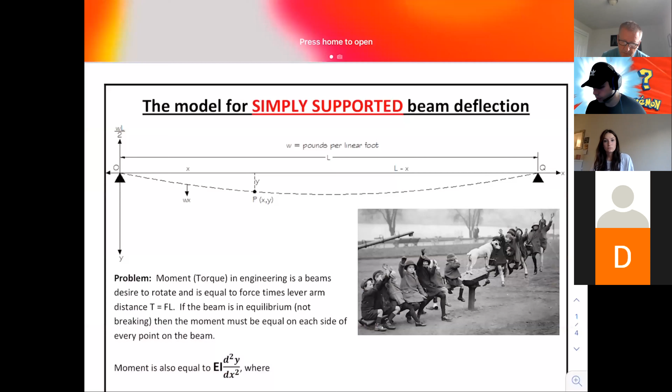It's everywhere, and so that's what I want to look at in this project. I want you to understand it, because the neatest part about it is it's an amazing sales pitch for the beauty of math. And it's amazing because, ultimately, I'd like you to enjoy this, which means I'm going to tell you too much, which is good - I'm glad I'm telling you too much. I want to help you get this problem right, because it's just too neat not to understand. And as I said, I can't explain this to very many people - you've got to know differential equations to get there.

Let me see if I can give you a proper introduction to this. Let's see what's on this sheet right here.

So let's take a look at this. Moment, or torque, in engineering is a beam's desire to rotate, and force times lever arm distance is equal to torque. And you've probably seen that somewhere before.

In other words, if I have a kid on a teeter-totter, and you put 100 pounds of force over here on the teeter totter, and this distance right here is 8 feet. Do you understand the 8 feet figures into how badly that beam wants to rotate? And so does the 100 pounds. You might be able to say, yeah, if you doubled the weight, put a 200 pounder on there, it's going to want to rotate twice as bad.

And so it's both of those put together, and it turns out you just multiply them. So that'd be 800. We'll notice the units. This is important today. It's foot pounds if it's 8 feet. Now it could be 8 inches, but we'll say it's 8 feet and it's 100 pounds. You multiply those, you get 800 foot pounds of torque or moment. Engineers call it moment.

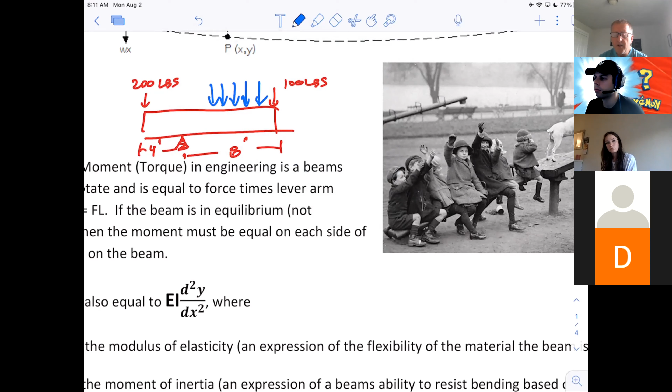And so what this is all based on is, well, this equation right here. Let me write that out a little more particularly, because notice I said moment is also equal to -- this is the equation. Now, what I still haven't decided is how much am I going to tell you about that equation. Well, at very least, you should be able to look at it and say, well, I don't even understand what that pertains to yet. But look, it's got a second derivative in it. And so do you agree that that's what we've been studying?

And that's why I can stick this in right now. That's why this project lives right here in this curriculum for me and for you, is because that's a second order differential equation. And you should be like, hey, I know how to solve those. Cool.

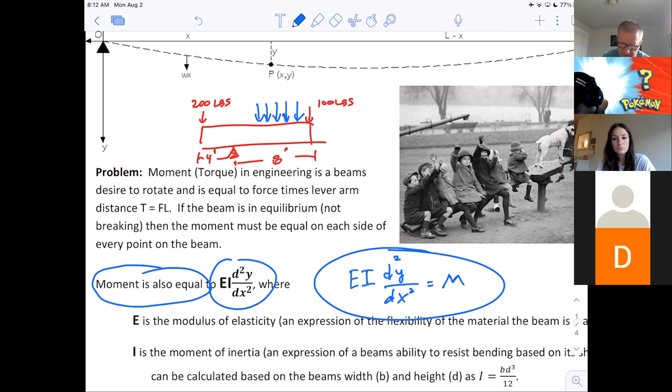And so let me give you at least a rough familiarity with what are all those letters, what do they mean. I did explain it on your sheet there a little bit, but I just want to give you a kind of a rough idea. And I have a picture at the top, but I want to draw a simpler, uglier one first, just to give you a chance to make sense of these things one at a time.

And so let's say, here's the big ravine, alligators are all down here. And so you say, all right, I'm going to put a beam across there and walk across the alligators. And so there's your beam. Of course, do you understand that you don't even have to put any weight on it and that thing is not going to be straight? It's going to bend down under its own weight.

Notice I didn't just say pounds. Why not? Because if I said the weight is 10 pounds, the question is, where do you put it? This isn't just in one location, it's pounds per foot. So if I say it's 100 pounds per foot, that means we've got 100 pounds here and 100 pounds here and 100 pounds here, all the way across it.

Most real applications have pounds per linear foot. That's how that unit is usually written, PLF, in engineering. But that isn't as nice as saying pounds per foot. One of the things I want to get across to you today is how important units are to help you figure all this stuff out.

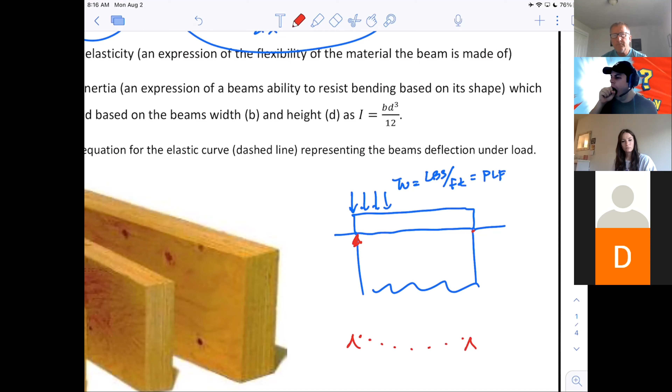Okay, cool. So the question becomes for us, and I'm going to draw this in more of an engineering fashion, this is being supported by concrete over there in the real world. Of course, the beam isn't going to be right on the tip top edge, it's going to go past the structure a little bit and have a solid place to sit. But what we're really looking at is something that kind of does this, and I'm going to exaggerate the bend so you can see it.

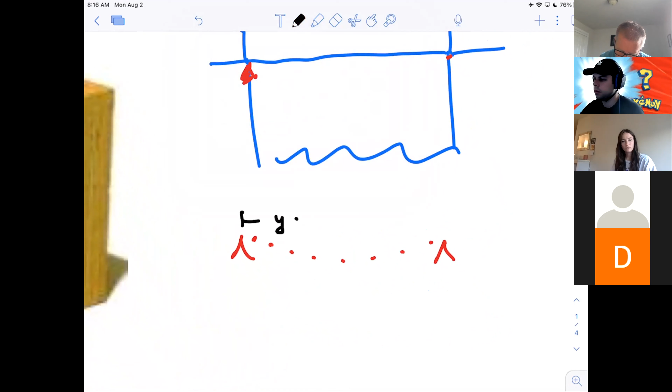That's what the bow is going to do, and the bend or deflection is the engineering way to say that—how much is that thing going to bend down? Here's some of the key things you need to understand. What we're going to do is go out a distance X, and if I draw this straight across, this distance right here is going to be our distance Y.

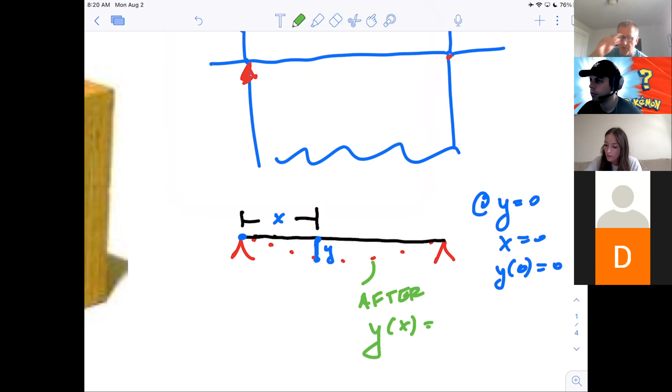Is it a circle? Is it trig, the sine wave? Is it like a chunk of a sine wave? We have all kinds of curves, right? Is it a parabola? Is it the bottom edge of a parabola? Is it the bottom edge of a circle? Is it a sine wave? It's the bottom edge of a sine wave, the bottom edge of a parabola. Can you appreciate, like, I don't know?

There's also something called a catenary curve, which we're going to study in this class too, that I'll show you later on. If you hang, like at a power line, you look out your window, hey, look, a power line. You support a string or a rope from two different ends and it just kind of hangs down. That turns out not to be a circle, not a parabola, not a sine wave. It's a brand new curve you don't know about yet, probably called... no, it's not a cycloid either. There's just a ton of curves.

In the end, can you appreciate the problem here? We need to come up with this - this whole thing hangs on this right here. I need to come up with the equation of that, because if I have the equation, then I own the relationship for y as a function of x, and now I can predict things. Now I can say this bridge is full of 1,000 people, they weigh this much, I understand how this is going to work, and I can predict how much it's going to bend, and then you can say that's good, that'll be okay. I'm gonna make that work.

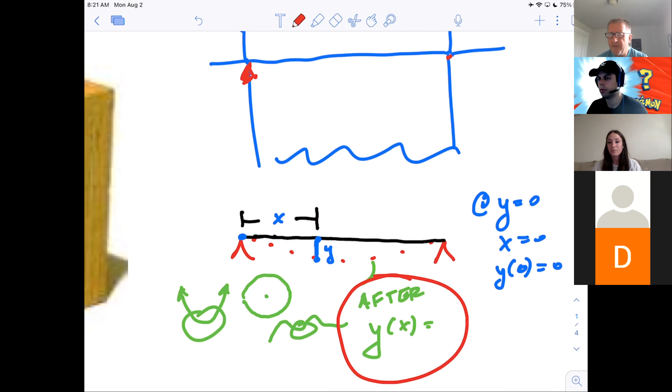Now, what else determines how much that's going to bend than just the curve itself? Do all bridges bend down the same? You tell me, what else affects how much a bridge is going to bend down? The material - how flexible it is. This right here is the material, basically a constant that has to do with the material strength. Some materials are more flexible than others, like wood is more flexible than steel. Does that make sense? So that's what the constant represents. What else affects how flexible something is, or how much it's going to bend?

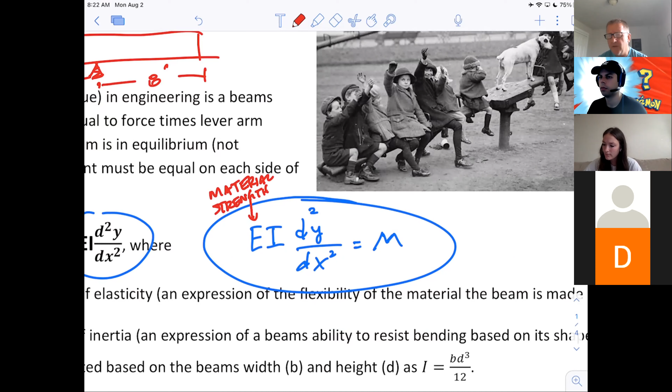Shape and size - one of the things that matters is shape really.

One of the things I can't do because I'm not at home, and some of you may know this, and I'm hearing things that I want to comment on, but...

If you were to walk across a bridge where you just dropped a board over the river, you would drop it flat because you can't balance on it turned vertically. But if you took the same exact beam and turned it on edge, do you understand those two are not going to behave the same? Which one of those is more flexible, the right one or the left one? The right one's a lot more flexible, probably.

It's the same exact board, made out of Douglas fir or whatever around here. But one way it deflects more - it has more deflection than the other. It's the same exact board.

Let me elaborate on that, just out of interest. Here's what happens to a beam if you bend it. If I turn this sideways, it starts like that, but then if it bends - I'll exaggerate this a whole bunch - it kind of does this.

What happens to the fibers in that? Why does the wood not want to let that happen? What keeps it from just breaking? Some of you have studied some of this, so you know things about it.

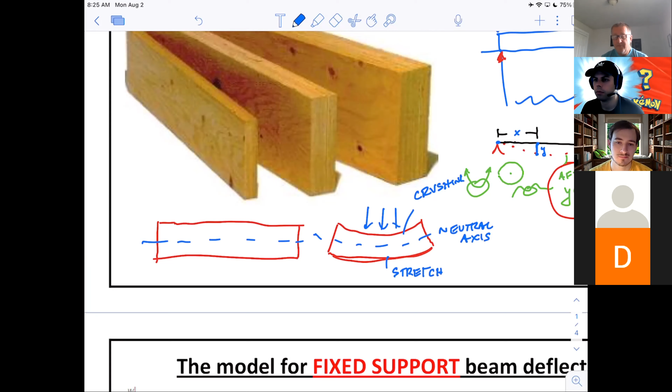If you have a weak material that can't resist crushing and stretching, then it's going to bend more. Well, that's effectively what this I is referencing - this is like the strength pertaining to the shape.

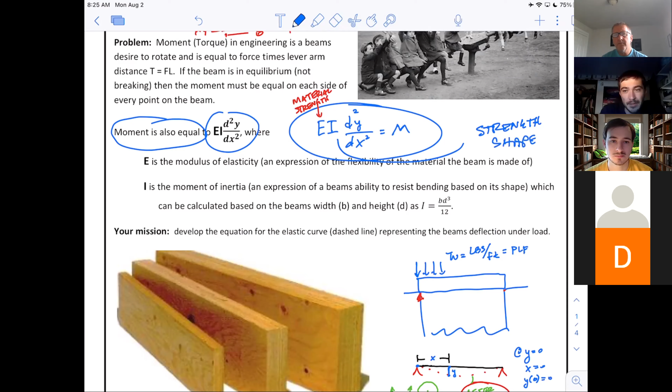Is that why I-beams are shaped the way they are? Exactly. Now think about I-beams for just a second. What happens to the neutral axis? Nothing. Those fibers aren't being crushed, they're not being stretched. Nothing happens to them, which means they don't matter. Does that make sense? Whereas the top and the bottom matter a lot.

Can you appreciate the top fibers, the very highest fibers in the beam, are doing the most of the work? And the lowest fibers are doing most of the work too. The closer you are to the neutral axis, you're actually doing less and less of the work. The further you are away from the neutral axis, the more important you are to resisting that bending. Does that make sense? Can you just kind of feel what I'm saying without me doing the math?

So it turns out that if you have an I-beam, there's kind of the cross-sectional view of it. Does that make sense? What you're doing is taking your wood or your steel or your concrete and saying, let's put it all as far away from the neutral axis as possible, because that's where all the work's getting done. Don't waste your wood in the middle.

These beams up here - do you agree that all of this wood right here is no help in a sense? Yet notice there's a whole bunch of wood there going to waste. Now, in the case of a tree, it doesn't really do much good to come in and just carve that out and throw it away. You can appreciate that's kind of hard to make.

But if you're going to pour concrete to make a beam, which is how modern bridges and overpasses are made, there's like 50,000 of these in Medford. Next time you drive underneath that overpass of I-5 in Medford, just look up at that - that's what you're going to see is an I-beam.

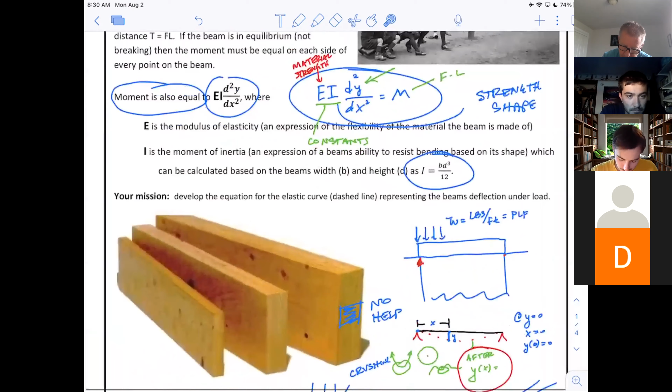B, where did I say that? Yeah, I guess I just said it right here. Width of the beam is B and the height of the beam is D. So in other words, if it's 2 inches wide and 12 inches tall, then you just plug 2 and 12 into that formula, and now you have a number.

So if you choose a beam, boom, you got a constant for that. E, if you choose a beam, you know, oh, what's it made out of? Oh, steel. Well, then you look up the number for the flexibility number. Boom, you have a constant. You're really glad to see that,

because if we're going to do this with respect to what we've learned in this class, we need equations with Y's and X's. Do you agree with that? I need Y's and X's. So when I see letters that aren't Y's and X's, I'm like, I'm going to jump off a building.

This is no good. So the fact that E and I are just constants, like if I change this to be 5, second, you know, Y double prime equals something on the other side, it's like, oh, I'm glad that's a 5, right?

But I'm not happy with this M. Do you agree with that? Because that's like the wrong letter. I need Y's and X's. If I'm going to take the derivative of this or take the integral like we've been solving lately, and we usually used Y's and T's, but that's what we did, right? Wasn't everything constants? And so we were kind of okay with that. I don't like M. M's a brand new letter.

And so what I want to show you now is how to actually get the second order differential equation that I'm going to ask you to solve for this project. So let's look at this better picture up here.

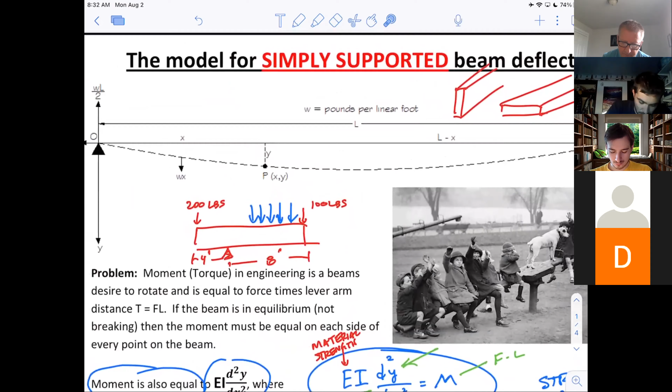Let me help you understand this a little bit more. Let's see, do I have a better example of this? Yeah, let's do it here. So I gave you these.

Let's stare at a couple of things. This is one of the things I love about this project, how important these initial conditions are. Notice the beam itself, and this little triangle in engineering language represents a support. This is called simply supported because the beam is just sitting on something, nothing else. It's not attached in some way, it's just sitting there.

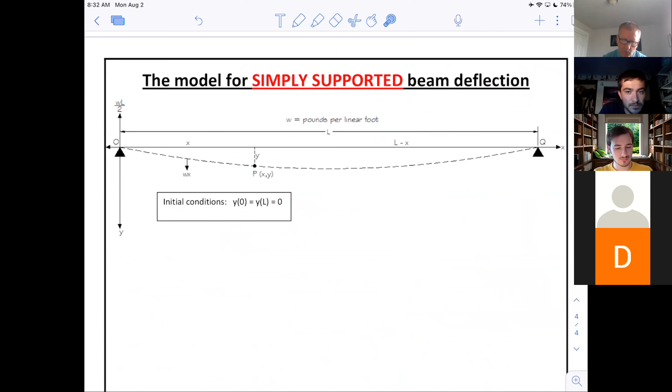Quickly, does everything beyond the initial support not matter then? Nice job, everything beyond that support doesn't matter at all. Notice this is a fixed support beam, we'll get to that later on. I don't even think I'm going to assign this to you, this might be an extra credit problem, just in the interest of time. But notice this one is fixed. What does it mean to be fixed?

Well, if I had a wall here and a wall here, and I decided to put a beam between them, does it make sense that I could actually run the beam back inside the wall a little bit if I wanted to? And now it's not just sitting there. Does it make sense to you that you could even take this wall away and it would still want to sit there if you had it attached to the wall in a fixed kind of way? So notice when it kind of leaves the wall, it actually wants to stay level, and then it's going to start bending down after it leaves a little bit.

So what's the difference, that would be a cantilever? Yeah, what I just drew when I erased the other wall, that's a cantilevered beam. And the one before, notice that was a simple beam. So why is that a fixed beam, I guess? Fixed is if you have it attached to the wall as opposed to sitting on something, that's kind of the difference. Oh okay, so the wall's the difference. Got it. Yeah, the wall, how you have it attached to the wall.

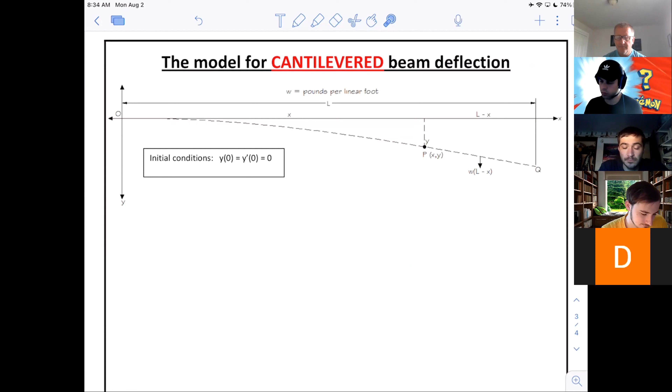If you just drop a beam, and that's why simply supported is a good way to say it. Because if you just fell a tree over the top of a river, it's not attached to anything, you're just setting it there. And if you do that, isn't it going to do this? Of course, as I said before, it has to be too long. Isn't it going to kind of lift up off the ground over here? Does that make sense? Because you just sat it there, so it's going to lift up in the air.

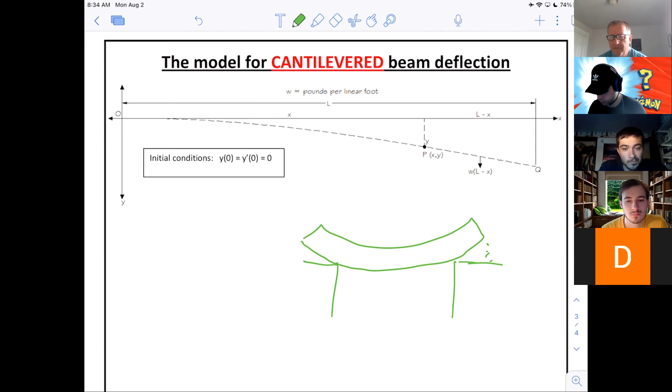And then this portion over here doesn't matter, that actually isn't helping. It's just there, if you will, but it isn't actually helping support. It's really just about what happens from here to here. That's what simply supported looks like. Whereas if you say, no, I'm going to put the beam here, and of course that's what it's going to do before you put any weight on it, right? It's just going to lay there and be, well not flat, but pretty close to flat.

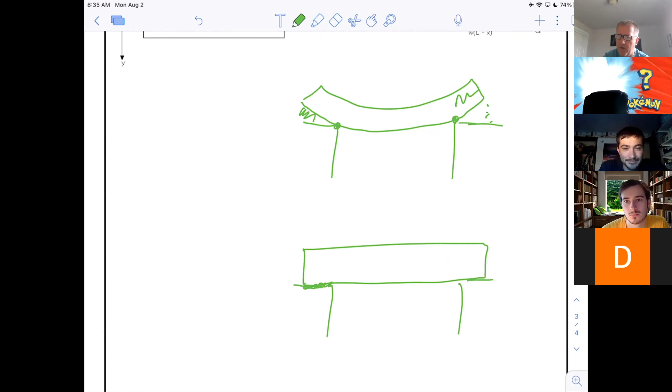But what if you went in here and glued it to the ground so that it didn't want to do this? In other words, it doesn't want to lift up in the air now. Does that make sense? Now it's actually fixed, you've connected it in some way. If that was steel, couldn't you weld it across there? Couldn't you run it past and weld a foot of it? And then it isn't going to want to bow the same.

And so in that case, after you put weight on it, it's going to have to leave the wall for a while before it starts to bend down. Does that make sense? Because it's glued down, welded down, or whatever. And so that's kind of what I mean by fixed.

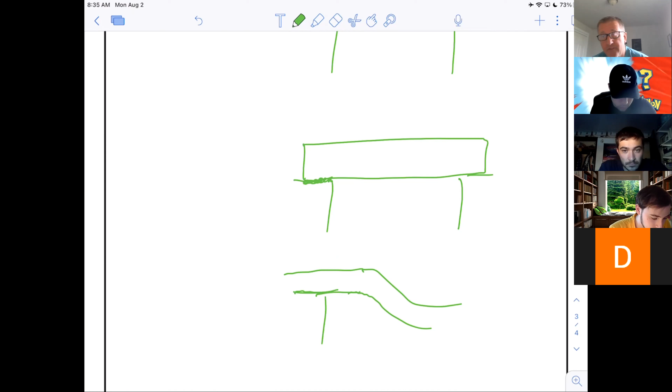Again, all I'm trying to do is help you understand the world you live in. It's just cool, it's cool to understand things. As I told you last week, I want this to ruin your life. I want you to get to the bridge and everybody's like, let's go take a picnic, and you're the nerd that stops and says, no, I want to look at this bridge, man, this is so cool. Or propose to our wives and wonder about the horizon. Exactly, I want your wife to be like, what's wrong with you? I want to ruin your life.

I watched King Kong versus Godzilla, and yeah, after taking this class, that whole movie was ruined.

So, notice, let's just do one thing at a time here. This thing is supported. We're after that curve there. We're after y as a function of x.

The length of the beam is L. That's how long the beam is. Notice I'm doing that as a variable because is every beam the same length? What we're trying to do is find an equation for all beams, not just for one beam, but all beams.

So the length of it is L. And notice W, pounds per lineal foot, PLF. That's how many pounds per lineal feet you're going to put on it. So for instance, if I said W is equal to 100 pounds per lineal foot and L is equal to 14 feet.

Does it make sense? You could figure out how much total weight was on that beam. If I take 100 pounds per lineal foot and I multiply by 14 feet, then the feet will cancel and I get 1,400 pounds.

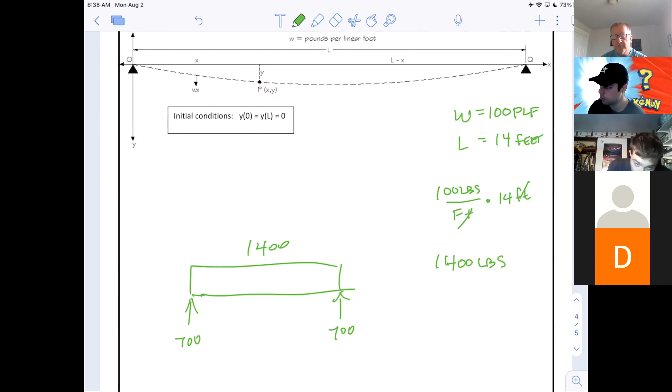Notice right up here, this is important. What did I say is pushing up right over there? Do you see why? There's a formula there that says WL divided by 2. Isn't that what we just did? Took the weight, pounds per foot 100 times the length 14.

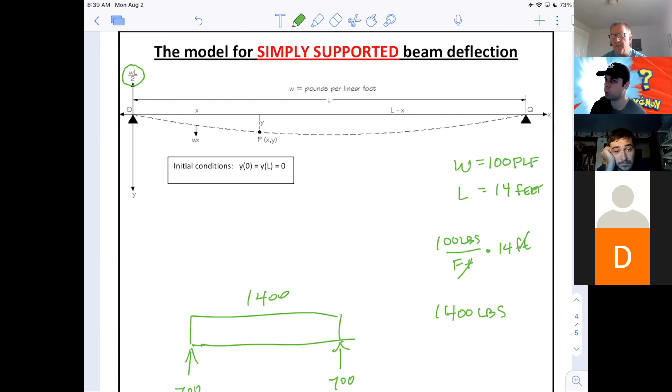We got 1,400, and then I cut it in half. So that's what the bridge is experiencing. It's feeling itself being pushed on over there, right? So in the end, it's being pushed on over there and it's being pushed on right here. Do you see that's what's causing the bending? The sides are pushing up, the rest of the beam is pushing down.

That's going to make it want to bow. That's what's causing the circular, well, it turns out not to be circular, but that's what's causing that dotted deflection curve. And so I drew it dotted because that's what's going to happen to it when you put weight on it.

And so, all right, we're understanding lots of this stuff now. This distance right here is X. And the reason it's X is because that distance could be anywhere, right? Like we need an equation that will tell us how big Y is for any X we want to pick.

And so if we said our beam is 14 feet long, you can understand an engineer might come back and say, okay, well, if I went 5 feet in from the edge of the bridge, then what would Y equal? Does that make sense? That's what I need. I need some equation I can plug 5 into.

And I actually get something like 2 feet or something like that. I need to know how much it's going to bend down. That's what I need. I need a Y of X equation. You understand that?

And so, this is the point 5,2. Well, that's exactly what that's saying right there. I need that point right there, 5, 2. So I'm after the equation for that curve.

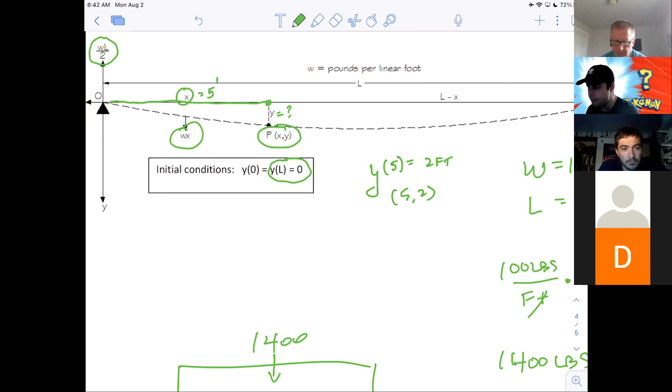Notice, does this initial condition also make sense to you? What does that mean? It means that at the other end, it's also being supported at the same height. Exactly. So if this beam is, as I said, 14 feet long, isn't that the point 14, 0? And this point over here is 0, 0. That's the only thing I know about this.

That's it. You understand that? Everything in between. At 5, do you agree Y might be -2, something like that? And I probably should add a negative because isn't that going to go down? So the point 5, -2 might be on it, but I don't know any of those points. All right.

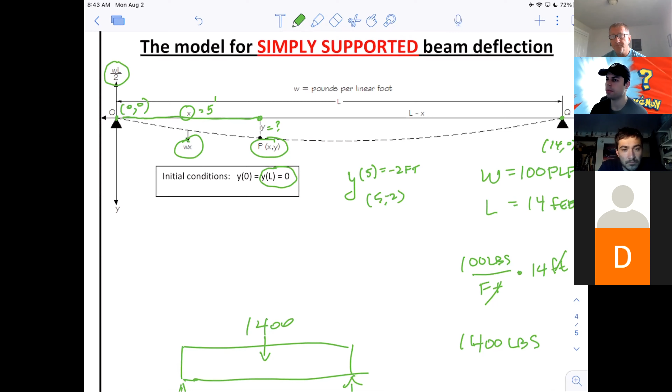All right, now we're ready. Oh, this was a bad decision. Let's do this a little more sophisticated style.

So the right side of this beam, what I'm going to do here is go out a distance of X, and I'm just going to chop the beam off. And we're going to look at just that chunk on that one side over there.

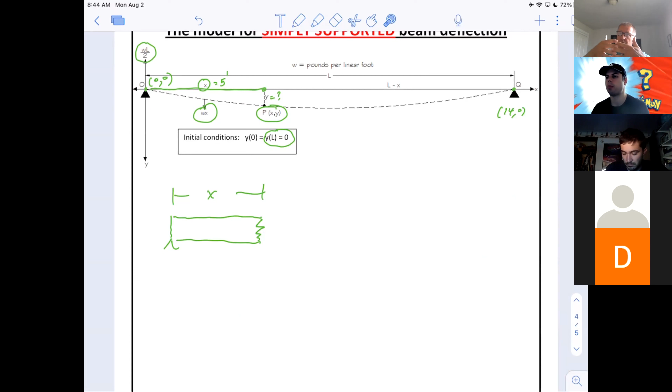The whole thing falls. Now, why doesn't a beam do that? Why doesn't my little chunk of beam that I just drew right here, why doesn't it do that? Why doesn't it just go and fall into the river? It's held up by another piece of beam next to it. It's held up by the other side of the beam. Does that make sense? Now, is it possible that it can do that? Like it rips apart internally?

This is one of the backbones to engineering. This is called a section view of the beam. And so it's because this chunk right here, where it's connected to the rest of the beam, is capable of resisting. It's effectively doing the job of my right finger over here. Does that make sense? It's the thing that's pushing back because it's connected to something. It's actually connected to something.

But let me add the forces to this that we just described. Do you agree that, as I said earlier, that is WL over 2? That's the 700 pounds. So that chunk of the beam feels that happening to it, right? So there's that arrow pushing on it. But then right in the middle, that would be W times X. As I said, if that was 5 feet over, if X was 5 feet, and we said the beam had 100 pounds per foot in it, wouldn't this be 500 pounds? In our example, that was like 700 pounds. Does that make sense?

And so notice those forces don't balance each other. What happens if you push down on something with 500 pounds and you push up on it with 700 pounds? What happens? It rotates. Yeah, it's going to rotate. It's going to rotate and it's going to go up in the air. Does that make sense? Because net, isn't this being pushed up with 200 pounds? Like somebody's bench pressing and they're pushing it up in the air. That bridge is going to fly up in the air. You see what I'm saying?

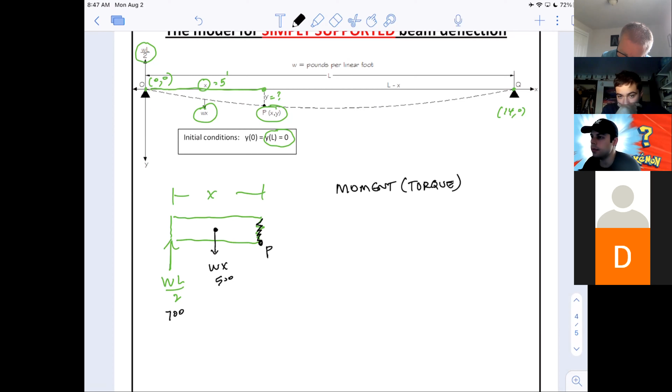So now what we're going to do is call this point P. Because those are the only two forces acting with respect to rotation, I want to find the moment, or the torque, around point P.

As some of you are saying, isn't that going to want to rotate? If you look at just the right side, it's going to want to rotate, just like when I support this pen over here—doesn't it want to rotate? It's not being equally supported on both sides, so it's going to want to rotate. Now, because of the structure of the beam and this connection over here, the beam can actually resist some of that. As it wants to bend down, is it going to be allowed to go down? No, because these fibers over here are saying no—they're crushing, but they can actually lift this weight. So the beam is capable of providing a force right here.

Now what you need is for the beam not to rotate. An engineer's job is, hey, look at that beam over there—what do you want to see? I want to see it not moving. If that beam is going down, you're fired. If that beam is rotating, you're fired. I need that to not move. That's the first engineering class I teach—it's called statics. I need it to be static. I need it not to move.

So let's add up—you know the language of calculus—let's add up all of the moments and see what we get. Now remember, moment, or torque, is force times distance.

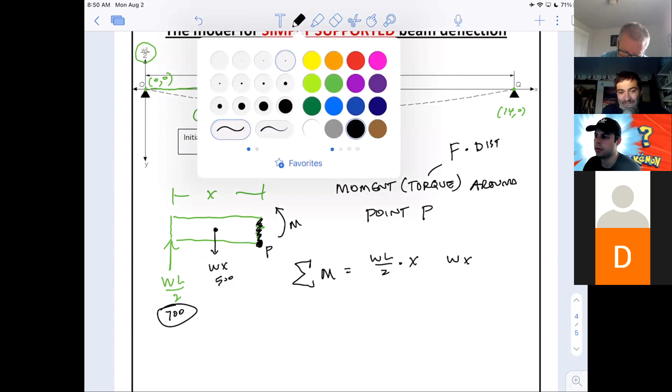What about this one, that 500, that WX? How far is it away from P? That's the WX, right? That's the force—so we have this force times this distance. And now we have this force times, well, what distance? How far is the 500 pounds away from P? Half of X. Do you agree with that? It's in the middle. Now, again, realistically, the 500 pounds is spread all the way across that, but one of the cool things about engineering is you can treat it like it's just one force in the middle. The key is it would be in the middle. So does it make sense that that would be a distance of X over 2?

Now, what about signs? You know this. Are those both positive signs? Do I add these together, or do I subtract them? Is this one positive and this one negative, or are they both positive, both negative, both working together, or working against each other? One should be positive and one should be negative, shouldn't it? Why? One is pushing downward on the bridge, so it should be negative, and then you have a force pushing back up, which should be positive. Again, around point P, doesn't this one want it to rotate that way, whereas this one wants it to rotate this way? That's good, because it means they're working against each other, since we don't want it to rotate.

So we need something to push back, right? If the first one is 700 times 5, 3,500 foot-pounds of desire to rotate, we need the other one to push back. Well, notice the other one doesn't push back enough. In our example, 500 pounds times a distance—again, we were calling distance X, 5 feet, treating it like it was a 5—that'd be 500 times 2.5. That's not very much.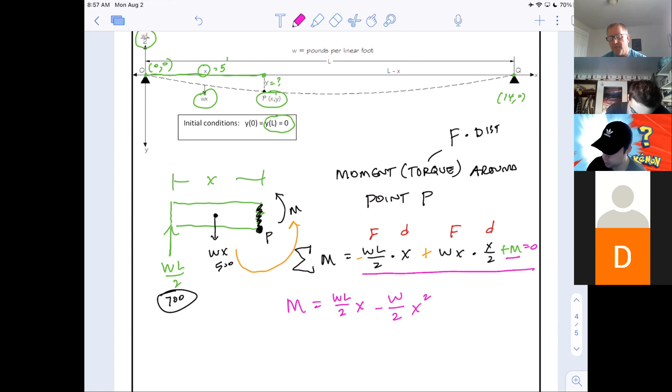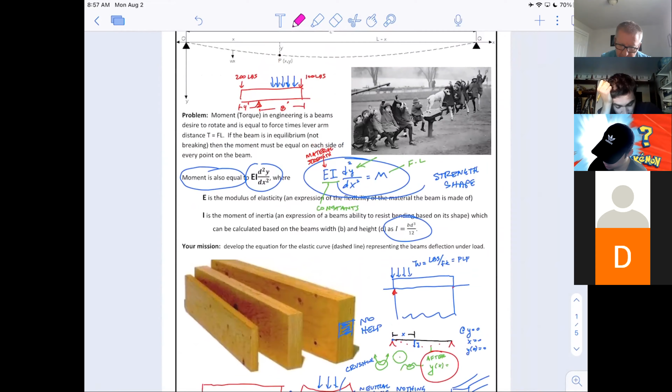Now, good news, friends, we're there. What was the guiding equation behind all of this? Here's a hint. It's that one.

Remember how I said, we see here that Y is the dependent variable. Think very carefully about this. Y is the dependent variable, X is the independent variable. Why is that in this picture? Because you're welcome to choose X to be any location you want, independently.

Again, we said, hey, what about 5 feet? But as a result of that, you're just stuck with the deflection or the bending there, right? You choose 5 independently, Y depends on that. If you choose X to be 0, hey, good news, we know the answer to that one, Y will be 0.

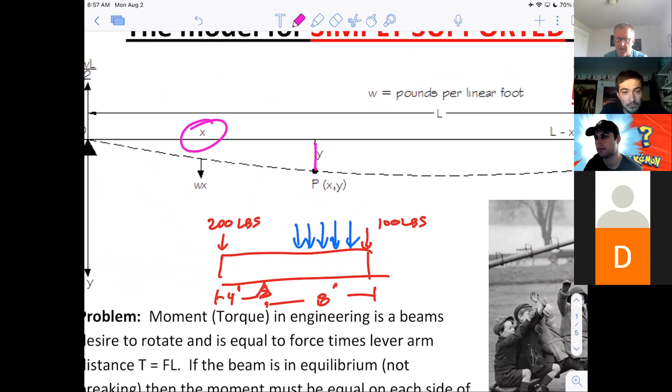By the way, we'll get to this later, but where would the biggest Y value be? Where am I going to find half the largest X? X over 2. Halfway across. Now that'd be half of L, not half of X. X would be L over 2. Does that make sense? But it'd be in the middle, right? Isn't that where the biggest is going to be? We'll get to that later, but...

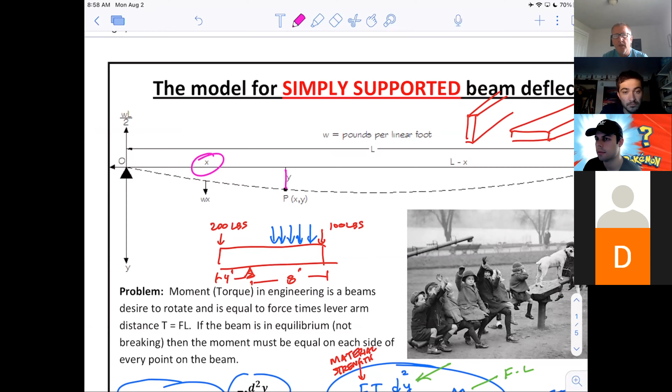And so Y is our dependent variable, X is our independent variable. I need Y's and X's in my equation. I'm okay with these because they're constants. And what did we just figure out that was equal to? Didn't we just figure out what that was with constants and X's?

This is very good news. It's very exciting. I'm getting chills right now, even though I've spent hours and hours trying to figure this out and understand it. I did this on the plane actually when I was flying out here, and I didn't tell the person next to me because I knew what reaction I would get.

Here we go. E times I equals... no, not equals, times the second derivative. Let's see, how am I going to write that? I'm going to write it the way it was written up above. The second derivative of y with respect to x, that now equals what we just said, WL over 2. And that's why I wrote it that way. I didn't write WLX over 2.

I wrote it as WL over 2 because that just represents a constant. And then it'll be multiplied by x. And then W over 2, which is also a constant, multiplied by x squared. So it's extremely important to understand here that we will be treating all the other letters as constants. E is a constant, it's just some number. I is some number. W is some number. L is some number. Don't forget 2. And 2.

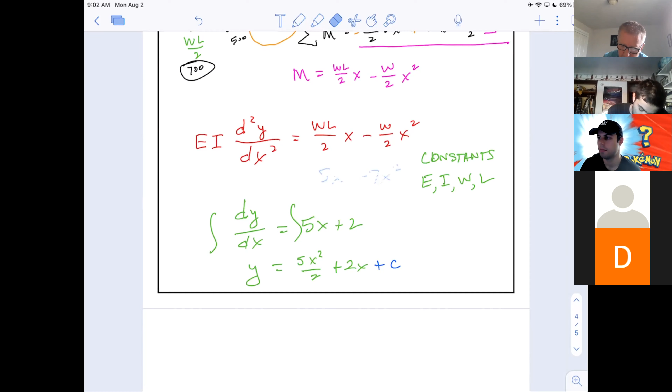I don't know if it was specified in the problem, but is our initial velocity going to be 0? No velocity, but we don't know. Our initial slope, we don't know. In other words, y prime—take a look at this. Y prime of 0 equals, we have no idea. We don't know that initial condition.

Why did you ask that, David? You asked it because isn't that what we were given in our textbook problems? We had a y of 0 and a y prime of 0, and we have a second derivative here, so aren't we going to need that?

But does it make sense we don't know? Because what is y prime? It's that slope right there, isn't it? I don't know what that slope is. If it was a lot of weight, isn't it going to be a really big slope? If it was not much weight, it'll be a lower slope. It's like, I don't know. We don't know. It's not good. We don't know.

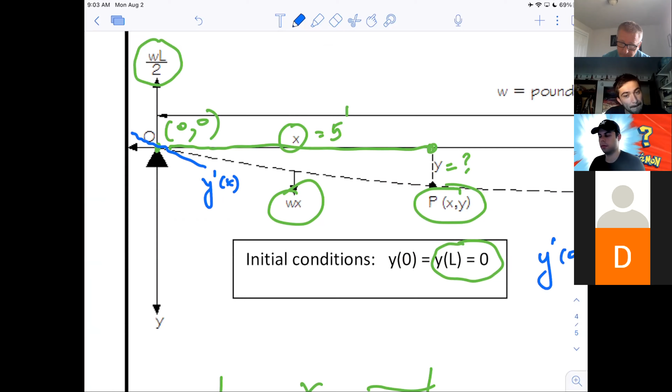But we do know these. So just so that it's all down in one place, I'm going to write those down. We know y of 0 and y of L are both 0.

Now, you don't need to know anything that I said. I could have started today and just said, hey, can you solve this differential equation, and we'd be in exactly the same place. I spent an hour giving you at least a shot at some conceptual understanding of where this amazing, ubiquitous second order differential equation comes from. Now I'm just saying, can you solve it? Can you find the equation y as a function of x given these initial conditions, ignoring, frankly, E, I, W, and L?

We would need to get a particular solution—we'd need that initial y prime value, wouldn't we? Nope. You'd think so, but you don't. Yeah, because there's no actual normal y prime showing up in the differential equation. We don't actually need it.

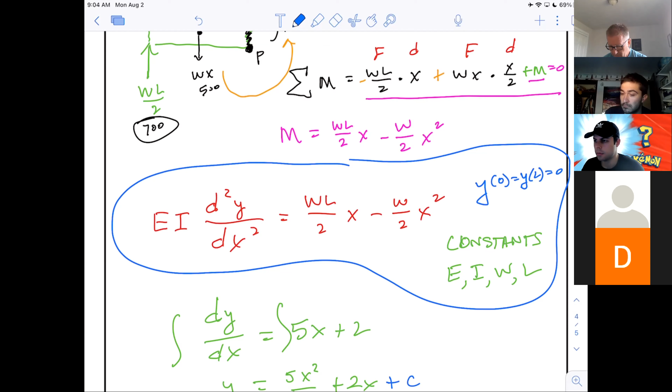By the way, notice for the fixed support, here you do know it. Y prime of 0 is 0. If it's attached to the wall, isn't its initial slope actually 0? We would know it in that case. You have a totally different set of initial conditions.

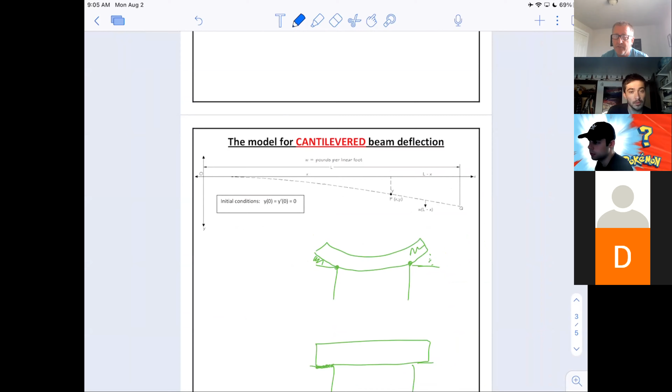It turns out that the fixed support beam, the cantilevered beam, and the simply supported beam all start with this exact same equation. The only thing that changes—and you can appreciate those are three totally different cases of how engineering works in the real world—is what initial conditions do you have. And they make totally different equations, which is amazing that it's one differential equation that covers all three cases. Unbelievably cool.

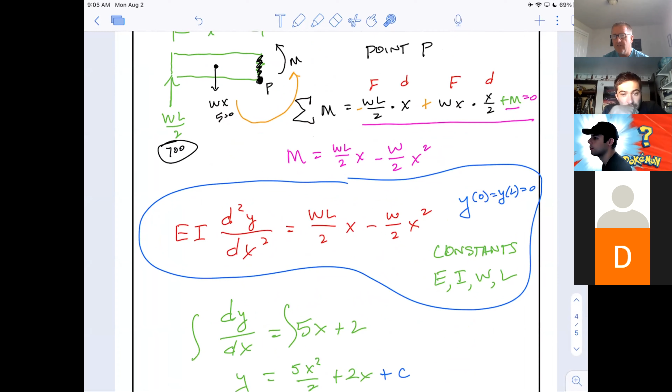So your problem is the simply supported beam. Make the calculation. If you want to tackle the fixed support and the cantilevered beam for extra credit, or you're just interested, that can be an ongoing conversation between you and me, for extra credit. And this is the kind of extra credit that would be worth a lot at the end of this class, both because you're showing interest as a human being and because it's like a challenge. You're not going to just finish this on your own—this is hard, there's a lot to know here.

Because those other cases—actually, I just lied. Those other two cases, let me think for just one second. Actually, this setup is the case for the fixed and the simple, but not for the cantilevered one. This part over here is different for the cantilevered one. So if you do take on the extra credit, save the cantilever one for last. Try the fixed support one—that's the exact same setup, but it's not true for the cantilevered one.

So I'm going to shut up for a while and give you time to try to solve that. This is actually not that hard to solve, as long as you understand that, hey, I'm going to have to integrate twice.

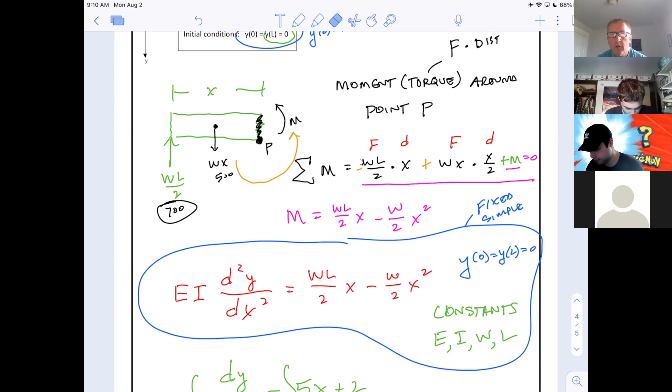What do you got, David? Do the constants just cancel? I think I got it - here, I could just quickly write it on the screen, it'd probably be easier. Yeah, I agree. I left it implicit. Could be wrong. Ultimately, that needs to be y, not y squared. Okay.

So my constants ended up canceling out. Could be wrong, but this is what I got. How did you end up with y squared? Because it's a second derivative of y, so it should just be y. Y squared should not have shown up there. How did you manage that?

Second derivative of y? Well, I integrated twice, so maybe I did that wrong. Because I got... I think you integrated twice and thought that would leave a y squared behind, but it just leaves a y behind.

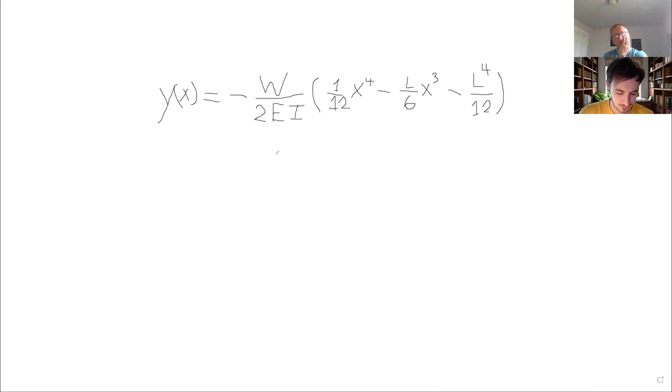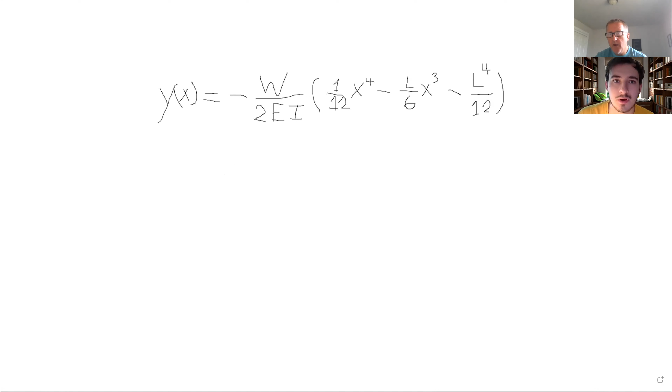Yeah, so how do I... So I'm going to let you think about that. I think I got that. Okay, keep thinking about that, you're doing awesome. I'm going to go back. Let's go back. Okay, yeah.

Which I did y, and then I integrated it again, and I got y squared over 2, and that screwed me up, kind of. You integrated a third time? No, I just integrated wrong.

Oh Doug, I need you, man, I need to go in the breakout room. Okay, let me say one thing to everybody before we go. Okay.

Both David and Ben are smarter than me, and I say that as a tremendous compliment. Obviously, I understand this better than them, but it took me way more time to understand this than it will take them. That's IQ - they probably have a higher IQ than I do. Many of you do actually. Took me a long time to figure this out.

I said the same thing to both of them, which is, and so I'm saying this to all of you right now: is y of 0 equal to 0? And in the equation you just told me, is y of L equal to 0? The answer in both their cases was no. Your equation does not meet those initial conditions. The integral taking here is actually pretty easy, but the initial conditions are killer - you really got to think about them. So check that.

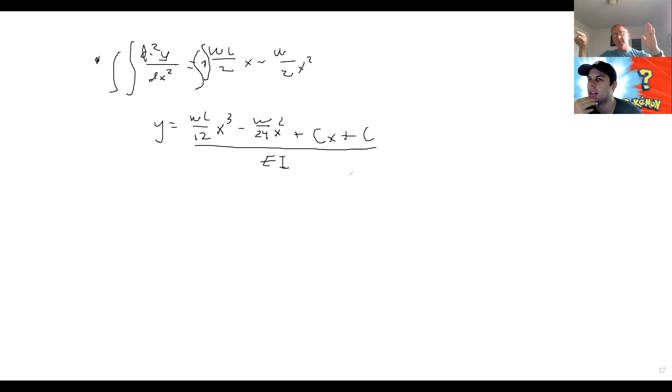So for a second, what does L stand for in this, when it says Y of L equals 0? L is the length of the beam - when you get to the other side of the beam, the deflection is also 0. I thought L equaled X. X is anything between 0 and L.

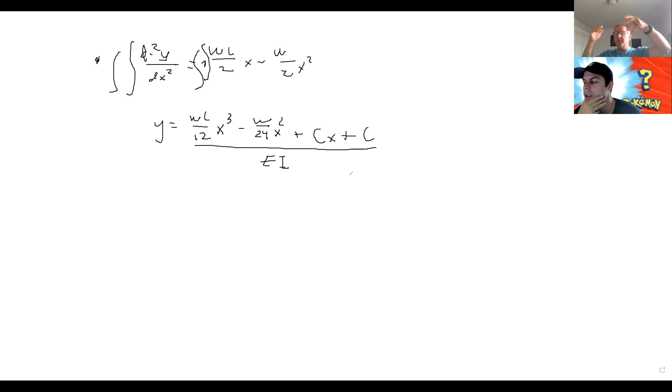So if your beam is like 14 feet long, X could be 7, X could be 6, but X can't be 16 because the beam's only 14 feet long.

Did we establish L is the length of the beam, and that it was 14 feet in the front part? Not for real, I just did that as an example because it's harder to do this with letters than with numbers. We need L not to be 14, otherwise we've only solved this for 14-foot beams. We need to solve this for all beams in the universe.

Gotcha, okay, so L is a constant, but it's the length of the beam. And however long the beam is, when you get to the other side, Y is back to 0 again. Does that make sense? Yeah.

So then all you're doing is setting this equal to 0 and then solving for the two constants, the two C's, right? Yeah, but the problem is it has to work for X being 0 on the left side of the beam and X being L on the right side of the beam. And that's how you're going to find the two constants.

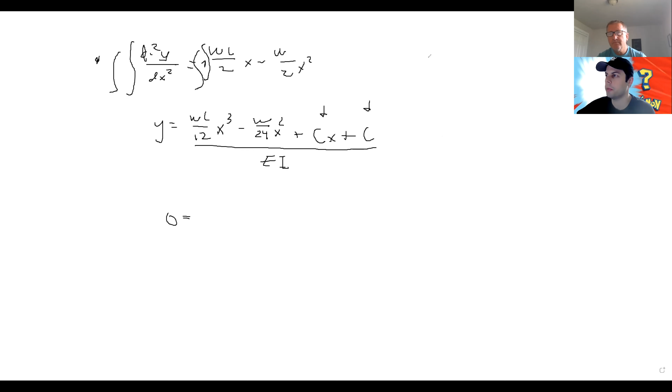So this is set up kind of just how we did with the homogeneous equations, right, with the multiple order homogeneous equations. All right, I think you're there, that's a good jumping off point for me. Yeah, thank you. Okay, back I go. Sounds great.

Who else is ready? Can I check my answer, Doug? Oh yeah, you can come too, Thomas. Yeah, I'm sticking with folks that haven't been over there yet. Thomas, I saw you, let's go over there.

So pull up a whiteboard and scratch around. Let's see. I don't know how to do that. Good, that's a good takeaway from this. So actually I'm thinking the same thing. What options do you have? Chat, participants—no, it's not participants. Reactions, breakout rooms, share screen, video, mute, stop recording, view, huh. I could Google it real quick, there's only so many places you can click here, so how hard could it be? Let's see, yeah, I kind of wish I had a notepad for this very reason. Everybody that's been over there so far has just been doing it with the mouse, but it's like we can understand, even though it's all first grade looking, who cares? View, review, speaker view, that's weird. How come we can't? Let's do—screen share, click whiteboard. There we go. That's it, you got it.

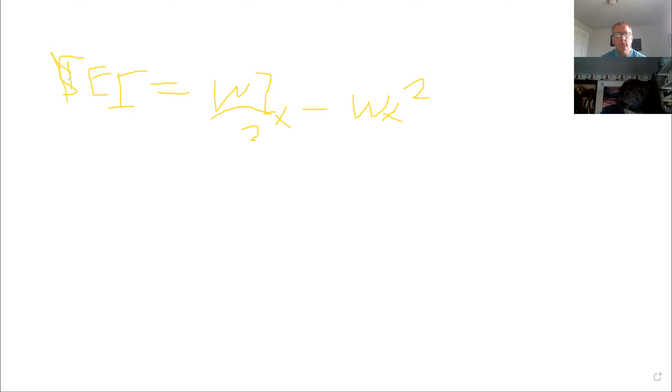So my first instinct is to—oh, I'm skipping ahead, that's a dy2 over dx. You're fine, and that's totally what that says. Yep. So my first instinct is to get this right here by itself, so then divide the EI over.

Okay, so we have the dy/dx, we'll just put an x. And then is that WL over the EI, to X, and then WX squared over EI—by the way, that WX squared was also over 2. Oh, earlier, so just throw a 2 down there. Yep, you're good, that's it.

And then so then we take the derivative, or the integral, yes, but the—yes, double integral. And then when we do that, this grows a 2, right?

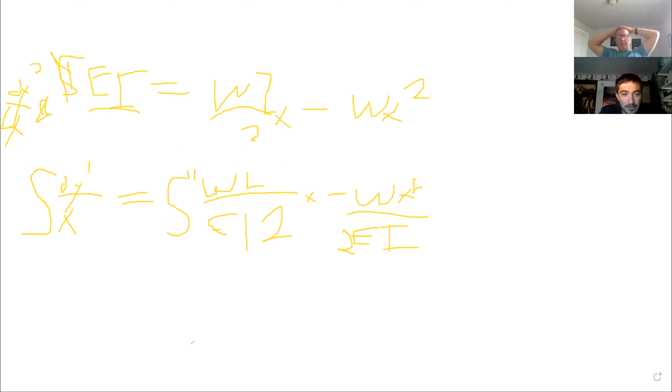Yeah, uh-huh. And then so do we keep all of our constants, or are these starting to? No, you just keep all the constants, they just come along for the ride.

So then this is where I'm just kind of like, there's so many letters going on here, it's getting kind of like, whoa. Yeah, but that's exactly why I thought of it. That's why I wrote the WL over 2EI just out to the front, because it's ugly, but it's just a constant. It's like you're taking the integral of 5x right now.

Okay, nice, so then we just have to remember we get a constant at the end. Correct. And then when we integrate for a second time, we get an X, and then plus C, that's exactly right. And those two C's are different, right? So one C1 and one C2.

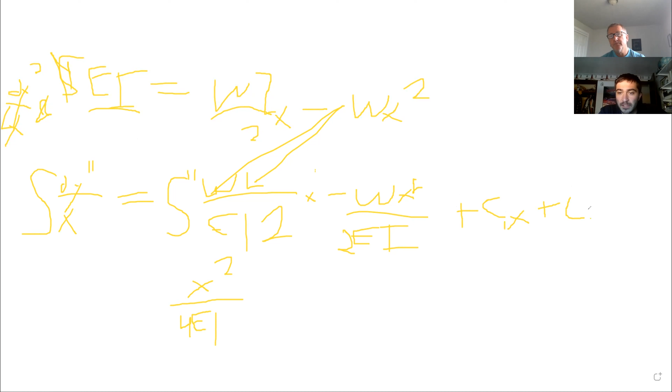Well then this is kind of where I hit a roadblock. So now we solve for this equation. So see, what you need now is you need to figure out what C1 and C2 is. And they're going to be constants, but unfortunately, they're not going to be just like 5 and 7. They're going to be W's and L's and things of that nature.

But the key thing is when you plug in X is 0, the Y on the other side better be 0. And when you plug in X is L, the Y on the other side also needs to be 0. So how can you find a C1 and C2 that bring that about?

Not easy, but you've got it. That's the problem now, you've totally got it. So work on getting those. The integral of x is x squared over 2, and the rest of the constants come along for the ride. That's not that hard. The hard part is, how do I find C1 and C2? That's our million dollar question that we're looking for.

Yep, okay, cool. Nice job. Alright, let's go back. Thank you, nice work, I think.

Now let me say something to everybody here. Your biggest X on the other side of the d2y/dx squared thing, the biggest X over there is X squared, right? What's the integral of X squared? It's X cubed, true? What's the integral of X cubed? X to the 4th, you agree with that? That's the answer, by the way, to the curve earlier.

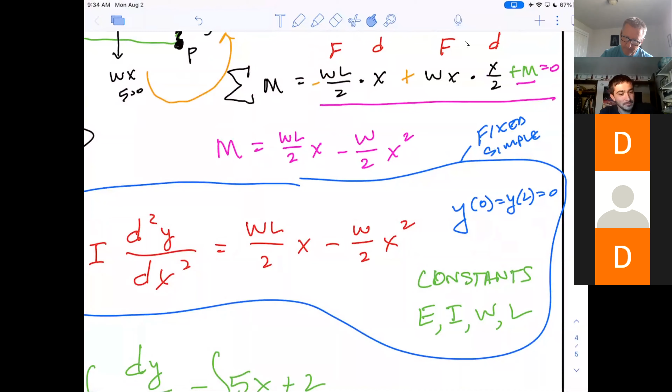Now think about this, do you guys know what X to the 4th equations look like, don't you? What does an X to the 4th equation look like from Math 111? It's like a parabola, but with a flat thing at the tip. Yeah, 4th degree equations look like this. They either look like this or they look like this, right?

By the way, is that fourth degree equation a negative or a positive? Which one is it, which one of these two? Is it a W or is it an M? It should be the negative. It's the negative. Do you know which one of these is the negative, from Math 111? It's been a while, do you know which one it is?

The one pointing, the one on the right. Is it the M or the W? You might be wrong, take an educated guess. Isn't this what y equals x squared looks like? And isn't this what y equals negative x squared looks like? Which one is negative x to the fourth? Just like the parabola, it's this one.

So where's our beam in that picture right there? In the center, in the center. It turns out that's what a beam does right there, it's a fourth degree polynomial. Again, the cool part of this is, wasn't this topic I just raised really boring to you when you learned Math 111? Maybe not, you guys like math, so maybe it was cool to you. But you can see why most people are like, who needs to know this stuff, I hate this stuff. The answer is, well, have you ever walked across a bridge? Then you do - well, you paid somebody to. But isn't that cool that it's like a negative fourth degree polynomial that turns out to be the equation?

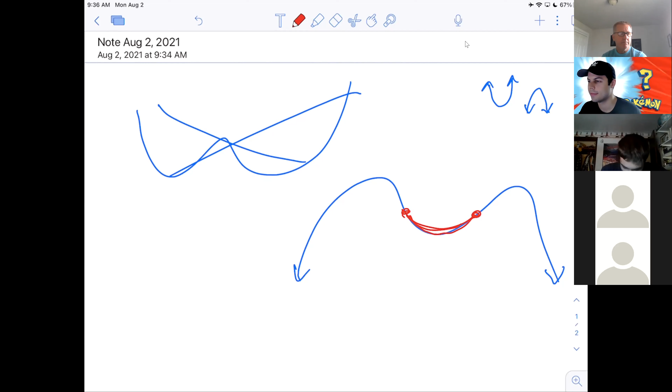All right, who else? I'm kind of stuck. Okay, Raymond, let's head over there. Okay.

So if you can ask me your question verbally, do it, but more likely - yeah, is there a whiteboard? How do I whiteboard, draw on that, scratch on there and make it ugly? How do I draw on the whiteboard? Go to share screen, I think.

Gotcha, that's it. Okay, so this is what I have for my y prime equation. I don't know if it's right or not. Yep, integral of x is x squared over 2.

Okay, hang on one second there. Yeah. Just gonna add that. That's what I got.

So there was no L. One of those equations had no L in it. Oh, my bad, I was wondering which one. It's the cube one. Yeah, that's just W, isn't it? Oh, there we go. Yeah, got it. Okay.

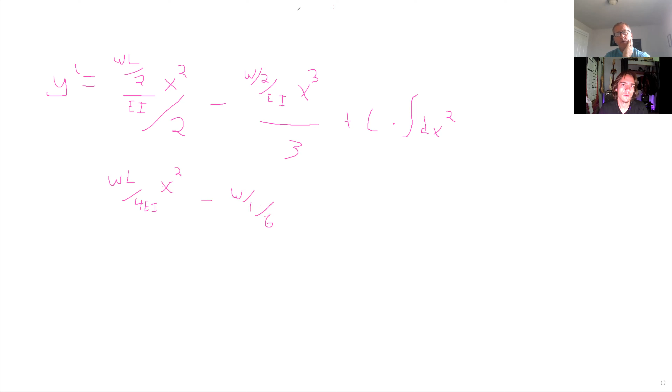Think of it as cleaning up fractions is really just multiplying by the reciprocal. In other words, if you look at the top, you say, hey, what's W over 2 divided by EI? Isn't that W over 2 times 1 over EI? You multiply by the reciprocal because EI is kind of like a whole number, it's like 5. Well, dividing by 5 is multiplying by 1/5. I see. Okay, that's it.

So try to ignore those constants and just pretend they're like 7 or whatever. Good. Now take the integral of that, what do you get? Of just this right here. Yeah, because that now is actually equal to y prime.

I'm gonna have more of these again. Okay. But I'll notice, yeah, so clean that up, but don't do it now. You're doing great, keep going.

Yes, yes. And do you understand that those two C's are not the same C? So you might want to call them C1 and C2 or something. You totally have it, and that's equal to y. Like you've now taken the integral of the derivative twice, and now it's just y. You have y equals, you got it. All you need now is to figure out C1 and C2 in such a fashion that if you were to plug in x is 0, y is 0.

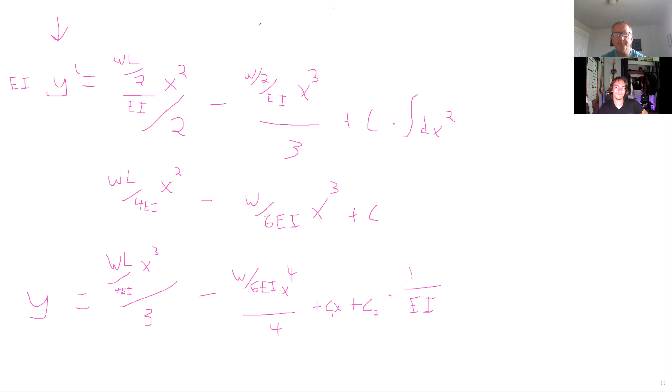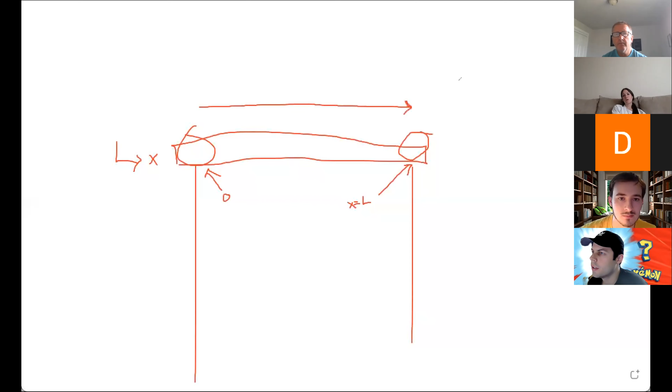Okay, thank you. Let's head back. All right, your boundary condition. Go a distance of L this way. Okay, distance. And so you're going to have a curve down here. And you're going to want to evaluate your initial conditions here and here. Right, yeah, and so the value at this curve is y of L. Right, and we're saying that it's also at our y equals 0. Right, so we evaluate our function y at the point x equals L. Okay, I think I get it.

So you're not plugging in 0 for L though, right? I'm not plugging in 0 for L. I'm saying that at the point x equals L, the function has the value 0. Gotcha, okay, we're plugging in L for X.

Nice work, David. You were explaining something without telling him an answer. That was brilliant. Future teacher. Nice work. Thanks.

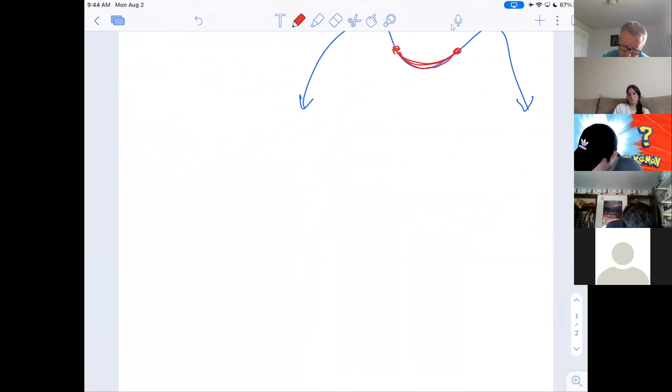So let me just say, I want to just say one thing. I'm concerned that I didn't make this clear to one of you in the breakout room. And then also I just kind of want to make sure everybody's on the same page here. Since you really started with EI, and I'm going to write it this way, Y double prime equals, what do we say? WL.

Conceptually, does it make sense that you could just ignore the EI for now because it's a constant, pretend it's not there? I think most of you have got to here now. So I want to, because this is the conversation I've had with everybody in the breakout room, and I want to be able to let you guys go.

So the first thing you're going to do is take the integral of both sides. And so what I'm going to do is, I'm not ignoring the EI, I'm just saying let's leave it over there and kind of ignore it for now. In other words, I'll take the integral of both sides, and the EI is still there. If you take the integral of the left side, does it make sense you just got rid of one of the derivatives? So now there's a y prime over there.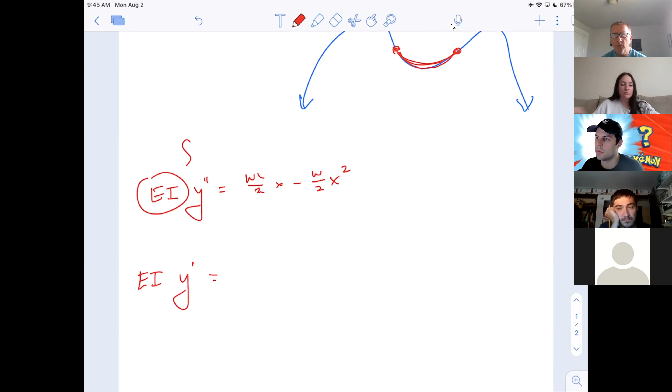But let's see, I'm going to pick on people that weren't in the chat room yet. Hannah, what's the integral of this term? It's okay to be wrong, but you're going to answer this whether I help you or not. What's the integral of 5x? Well, I'm just saying WL over 2 is like a number, don't let it be confusing, that's just a number times it. Go ahead. X squared times 1/4. Yeah, that's exactly right. In other words, it's x squared over 2, but there's already a 2 over there.

You guys all agree with Hannah? She's right. Let's see.

This is over there. Evold, are you there, Evold? Yeah, I'm here. Sweet, so what's the integral of W over 2x squared? Let's see, so it's W over 6x cubed. I'm writing down what he said. Is he right or is he not right?

He's right, nice job. Like, that's not terrible, except for, what am I missing, everybody? Oh, constant. What's a constant? Again, that's essential in this problem. If you miss that, you're not even going to come close to designing a beam. Like, that's essential here. Okay, that was easy.

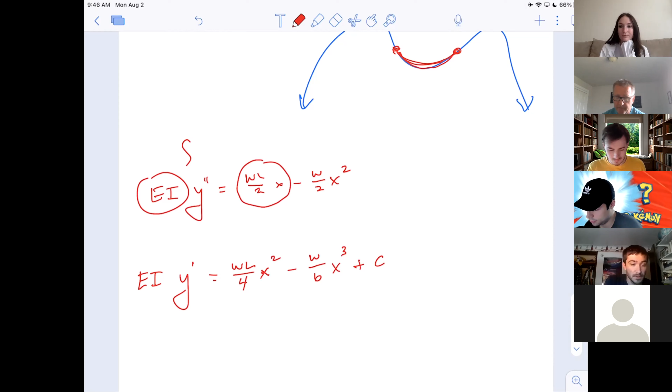We just took the integral of both sides. Let's do it again, I'm going to pick on other people. The EI is still over here just hanging out. Jerry, are you there? What's the integral of WL over 4x squared?

I'm not sure. Tell me just the integral of x squared. Is it 2x? No, you're thinking derivative, not that. Take your time. Um, I don't care, x cubed. X cubed, what else? What do you have to do with that 3?

It's the opposite of what you just did, but with... I can't function right now, honestly. I'm not sure, somebody help him. What do you do with the 3? Divide by 3. Divide it. Like a second ago, you multiplied by the 2 for a derivative. Well, in an integral, which is going backwards, you've got to divide.

And then there was the WL over 4 there, right? So then it just becomes WL over 12x cubed. Exactly, that's all, beautiful.

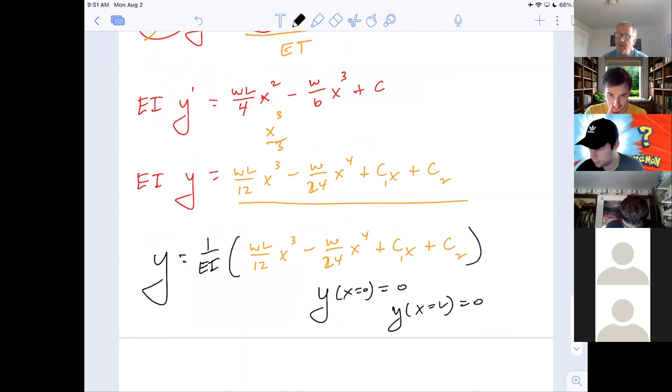You've got to come up with C1 and C2 so that that's a true statement. C1 and C2 are not going to be like 5 and 7. Look at your other constants - you've got E's and I's and W's and L's. Those C1 and C2s are going to be like WL over 6, or WL squared over E, not just 7 and 2. They're still constants, but in order for X equals 0, Y to be 0, and X equals L, Y to also be 0, you're going to have to find C1 and C2. When you do, you now own how beams work. You have an equation now that will do that.

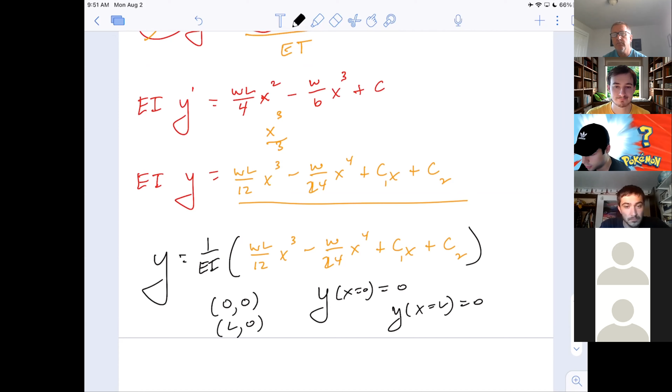So again, you don't have to leave, but we're at the end of class and want you to be able to. So I want you to find Y of X, and just note that C1 and C2 will have W's and L's and E's. They're not just going to be 7 and 2.

Secondly, I want to show you something rather amazing. I'm going to try this just totally live. I'm going to show you how to check your work. Let's see - stop sharing, sharing screen share.

Google. Are you seeing Google right now? You're seeing me, you're searching, yeah, right? So, see Google. I need the deflection - whoa, get your hands on home position. Deflection beam formula - notice there's one down there that says beam deflection formula simply supported. I'm going to Google search that.

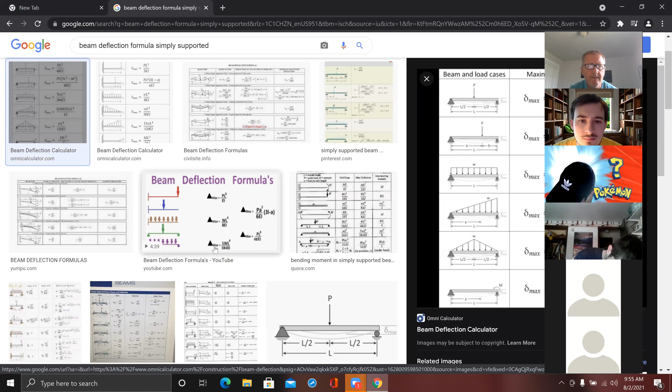There it is. I need it to be big. How do I make it bigger? Is it Control plus? Yes. Let me find one of them. There it is - see right here? You're all seeing my hand on it, right? See what it says? 5WL to the 4th. Write this down - this is the formula, this is the simple algebra formula that people use for this, and you're creating it right now. It's 5WL to the 4th over 384 EI.

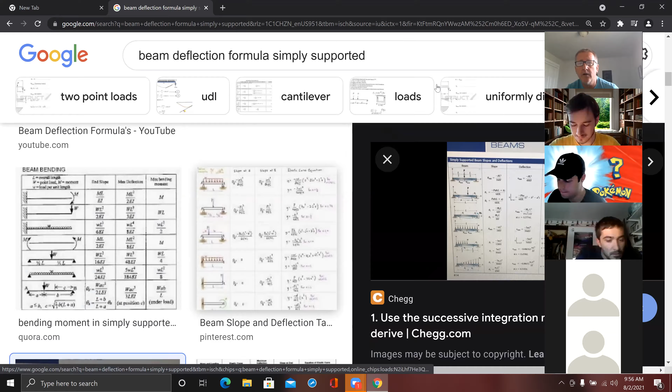Half of L. Now, so this is the value - Google search this yourself, that's a ridiculously simple algebra equation. Stop share, screen share iPad.

So is that what we're supposed to get at the maximum, or minimum I mean, of the curve? Like, is that the value? If we plug in L over 2, we should get that? Correct. So I'm gonna write out what David just said as soon as my screen shares with you - this is just like I'm getting chills down my spine.

So there's two things I want you to calculate. One of them is this cool equation, Y as a function of X with all the W's, E's, I's, and L's. But then I also want you to find Y max, which is the same as Y of L over 2 - if you go to half of the way across the beam. What's interesting is you will not find the equation that we're trying to make online. You'll find Y max because nobody actually cares what the deflection is 5 feet in. They care what the biggest deflection is because that's what determines whether the beam is okay or not. We just saw that the answer to that was 5WL to the 4th over 384 EI.

So in other words, if you go back to your equation that you think you got up here, hey, I think I got this right - if you put L over 2 in for X, it better pop out as 5WL to the 4th over 384 EI, or apparently you haven't figured this out yet.

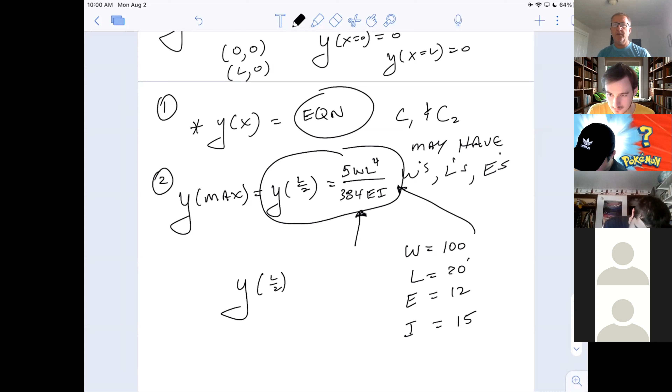So tell me if you want to go back to the chat room, one-on-one. I'd love to check my answer before I go. That's okay. Yep, see you in the chat room. Breakout room.

I feel better about this because I made some fatal errors the first time. So we have our last... You're smart, and if I'm teaching you something, that means I'm actually adding value to your life. So good, absolutely. I like problems like this. I like deriving things, it's a lot of fun. I totally agree, it's so awesome.

That's what I got for just the general, the particular solution. You are ridiculously close, but if you put in X is L, you don't get 0. You don't? Try it, do it live.

Yeah, the constant there is a little different than what I got. Don't say it out loud just yet. Yeah, I'm not going to. I'm not sure if mine's right either because the math later on isn't working out. Oh wait, does it need to be?

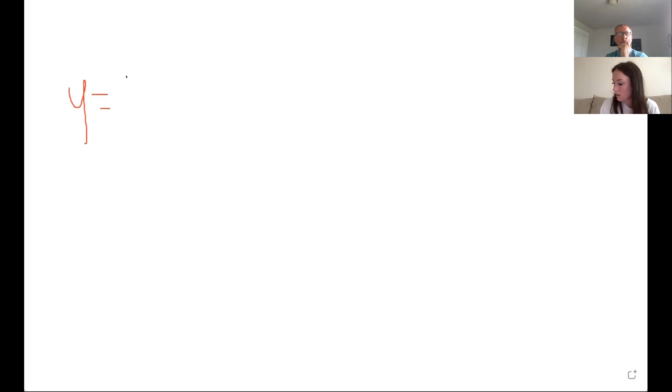Okay, so I have y equals, let's see, WL over, wait, WL to the 4th. That's after you plugged L in, right? Or plugged L into X. Like, give it to me before you plugged anything in, so I can see your original equation.

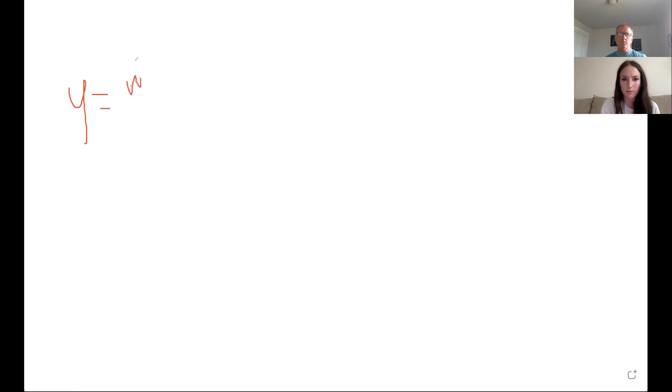So before, yeah, definitely. So my original equation was WL over 12 EI, and then X to the 3rd. Correct so far. Minus W over 24 EI... this is hard to write on. Okay, EI, it's okay if it's ugly. Then I'm tracking with you. Okay, and then X to the 4th.

Oh beautiful, that's a 4. Yep, totally. Plus CX over EI. And then one of our initial conditions was y of 0 equals 0, right? So then that C2, that last constant, turns into a 0 after plugging that all in. Okay.

So from there, I plugged in L for X, and I got, oversimplified obviously, WL to the 4th because L times L to the 3rd over 12 EI. And then, well, before I write this out, then I got minus WL to the 4th over 24 EI. Right, but those can be combined to get WL to the 4th over 24 EI.

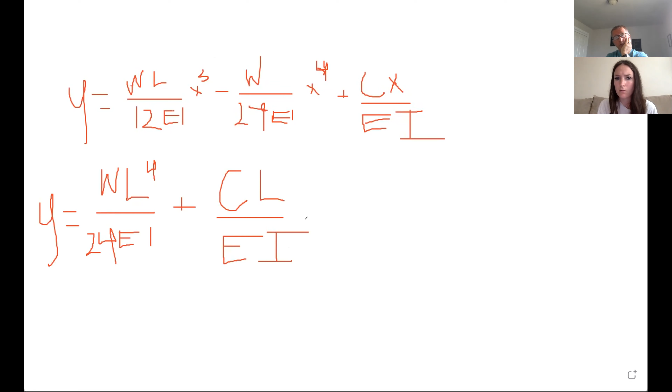And then you still have the plus CL over EI, right? Right, so that's what I have left is that CL over EI. And what's Y equal to though? When X is L, Y is equal to 0, right? So get rid of that Y and put a 0 over there. Okay, so...

0. But where do we go from here then? Now solve for C. You got it. Solve for C, because everything else is constants. Yeah, that's right. Oh, and then, okay, so then once we have that C value, then probably everything will come together so that I actually get that 5WL to the 4th over 384 EI.

Yeah, that's wonderful, that helps out so much. Okay, and isn't it a trip? Because it's like if you don't get the initial conditions, like the initial conditions are everything here. The integral of C is CX. Like if you don't tackle all that, you don't get to model a beam. So yeah, it's super cool though. Oh man, isn't it so cool? It's when I got the 384 EI on the denominator, I was like, yes, this is awesome. But I was just off by the C value.

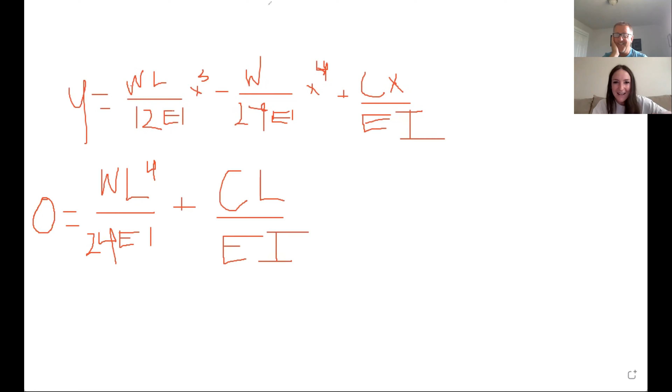So I just need to wait till you get the 5, man. You're probably gonna scream. I'm gonna be so excited. Okay, you're there, you're totally there. Yeah, I was so close. I was like, okay, this is good. Well, thank you. Yeah, okay, we're going back. Perfect.